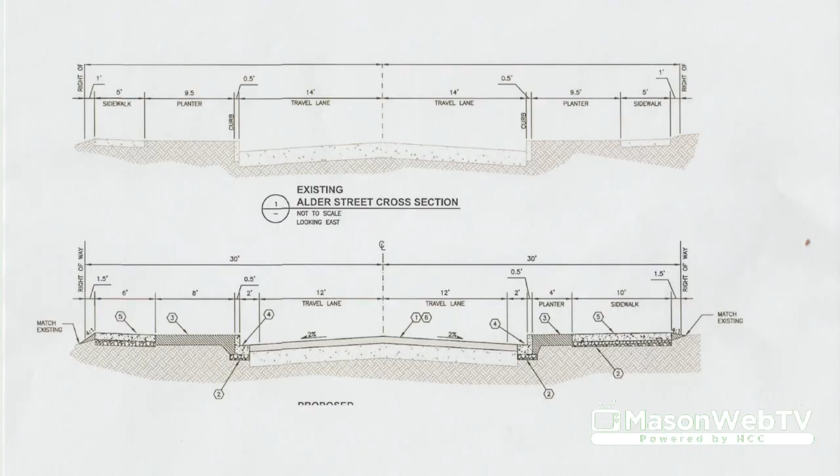Will this allow you to do some code enforcement on the north side of Alder? There are hedges across from the courthouse where you can't hardly use much of the sidewalk at all. It'd be nice to see code enforcement get people to trim their vegetation back so you can actually use the sidewalk. Yes, that will be a priority of ours, to make sure that vegetation is trimmed and taken care of before we move forward with this project.

So coming down the hill, the bicycles will be at full throttle along with pedestrians in that lane, because they don't slow down going down that hill. That is true. So there's no separation in that? There is not a separation at this point. And people on bicycles are not considered a motor vehicle by any means.

Is that what you're saying within your statute in Shelton? That is correct. And through the funding agency, TIB, this is also defined as a multi-use path. Bob might be able to speak more to that aspect of it. I think you said it correctly. I'm just curious—aren't bicycles considered vehicles? On the street, they have to obey vehicle rules. Within a multi-use path, though, they are not.

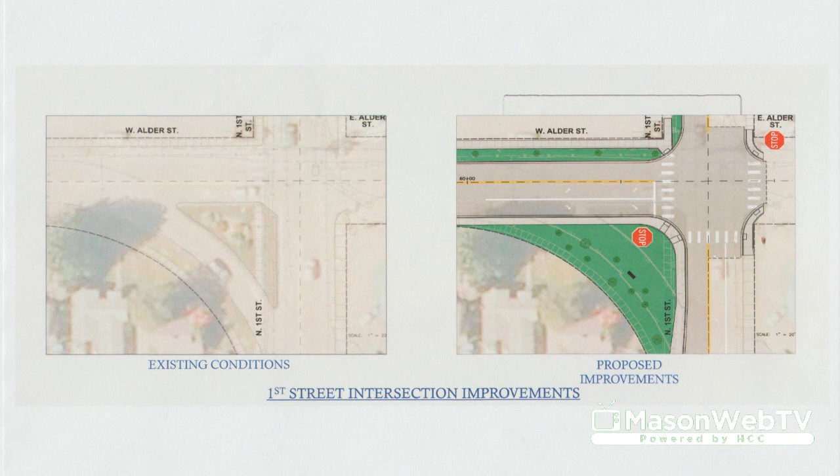So back up to First, on the drawing it had. So we're at First now. Okay, so at First Street, what we have right now is existing.

We've got this slip lane with a free movement. We've got a stop sign, southbound traffic at Alder, and then you immediately run into a yield sign as you get through the intersection.

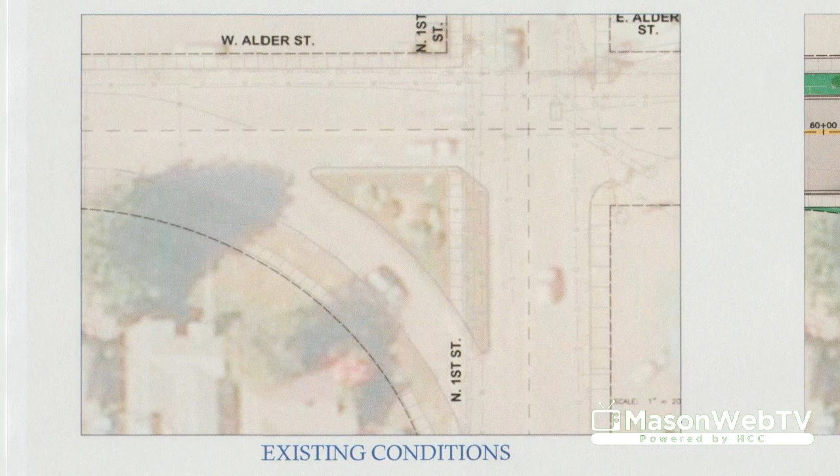We have identified that as a problem area, and our accident and crash data backs that up. So the existing proposal is to move to, and originally we talked about closing off this east side of First Street. That has now been taken out of the design.

So what you would end up with is a straight left turn lane with a stop sign, and then a right turn lane onto First Street, with a free movement on First Street north and south, and the addition of a left turn lane to not restrict traffic up the hill.

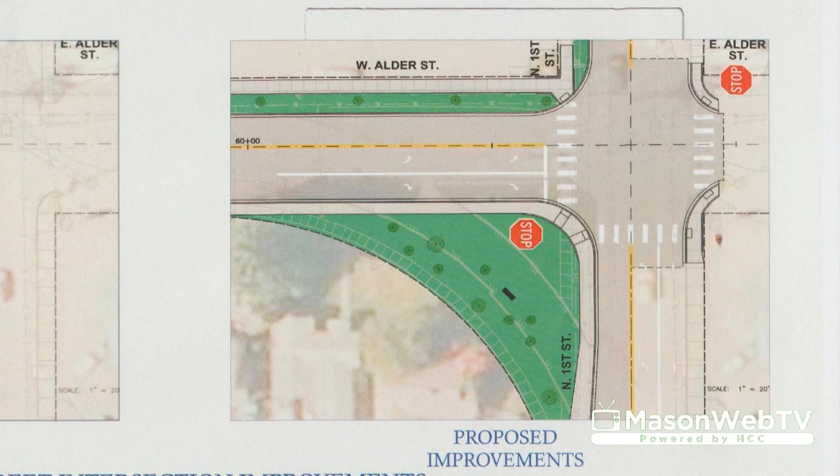So this is, at this time, the design that we are looking at for the First and Alder intersection.

I don't know if you've done a traffic count on San Joaquin, but I think you need to. That is the only in-town way off Capitol Hill. When traffic is heavy, particularly during school time or morning time, the only way you can often get out onto North Cliff from San Joaquin is when people are stopped at the traffic light or stop sign waiting, and someone gives you space to get in. Because it's a steady flow of traffic downhill, and if now it's a steady flow of traffic uphill too, it's going to be really hard to get off that intersection. And there's a lot of traffic up there.

I think at this point, this free movement up and down the hill is most likely going to improve that situation where we're not having that backup at the stop sign. So that is what we are looking at right now. We've got a traffic engineer also taking a look at that. WashDOT has reached out to us to take a look at what concepts we could come up with for this intersection. At this point, this is what we have come up with. I'm not saying it's the best option at this point. We are going to continue to study this and see if we have a better alternative to this configuration.

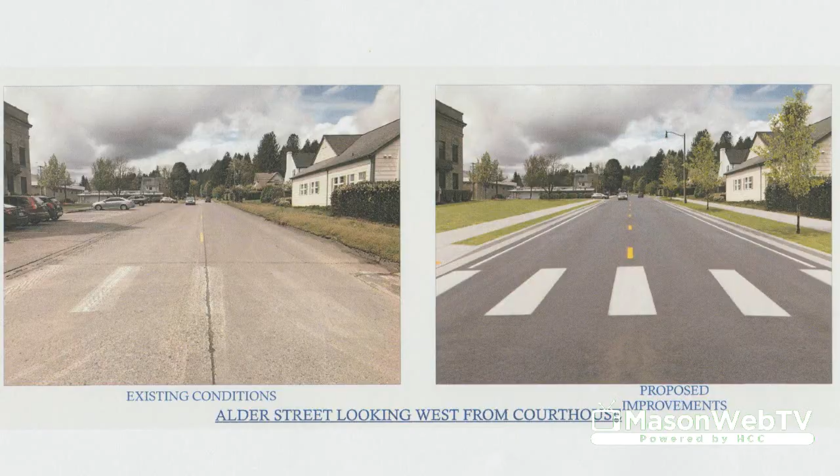So moving from First Street, this is the courthouse. On the left-hand side, you see the old configuration, and on the right is the proposed configuration. One big change is that there is no parking at the courthouse on Alder Street. That is proposed to be eliminated with some mitigation on the north side of the road at 4th and 5th. Right now, there is a large planter area on both of those roadways between Alder and Birch, which would be moving north.

So what we have talked with the county about, and we've had a few conversations with them, is how to actually create some more parking for them around the courthouse. On the north side area, between Alder and Birch, we would have nose-in angled parking created on both of those roadways, with most likely 2 ADA stalls located closest to the intersection at Alder, and then ADA ramps to cross to make it easier to get into the courthouse. So at this point, that is the proposal.

We've also talked to them about improving their gravel parking lot that is on Cedar - I think it's Cedar, where the old church used to be, right across from the sheriff's department. So we have been in talks with them about that being paved, with stormwater retention and all that.

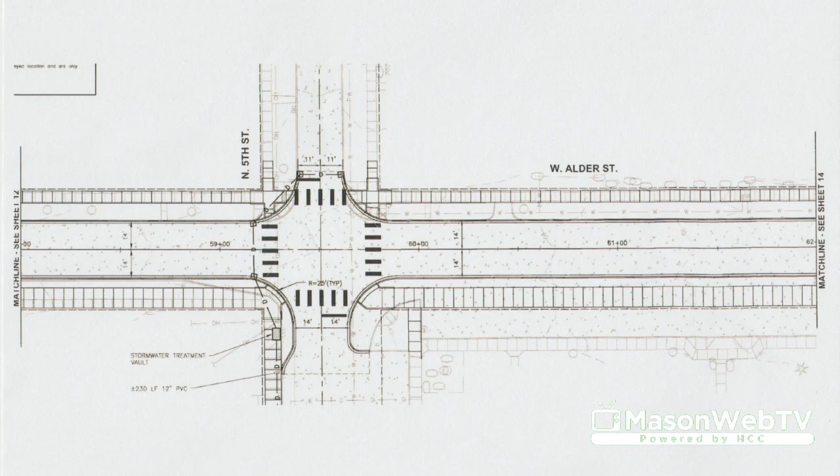So the thought right now is just trying to make that pedestrian movement a lot easier across that roadway. And the lane width there, it says 14, is it now down to 11, or is that 14? 11 is the proposed width at this point, and that is to provide some traffic calming and some slowing of those vehicles.

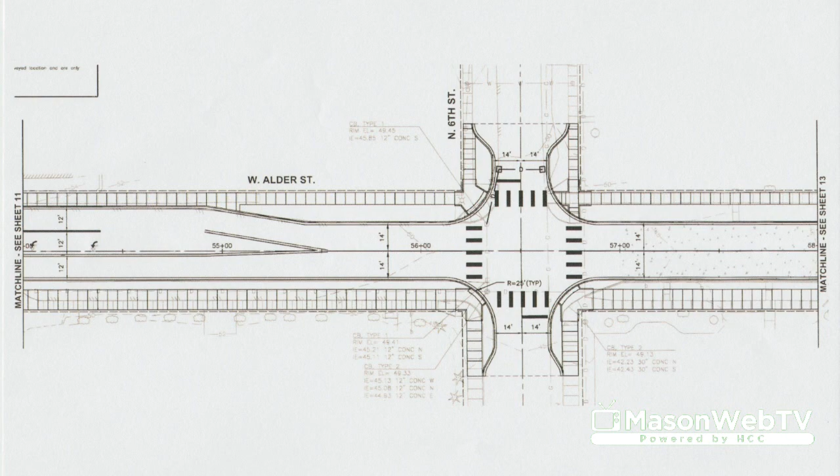And they do not have an elevator in that building, so to get ADA accessibility, they're coming right now off of Alder Street. Looking at this right now, there is no ADA parking along Alder existing. So creating some ADA parking on this side would make a fairly easy movement across this roadway to some ADA ramps here and directly into the building. We're hoping that satisfies Mason County and also the ADA public out there.

So moving through the intersection, the traffic signal at 7th Street would be a new signal. It would be upgraded, not the old style signals hanging off of wires. It would actually be standards that those signals would be attached to, something like what you see at 7th and Railroad. So a brand new traffic signal and traffic signal cabinet to move traffic through that intersection.

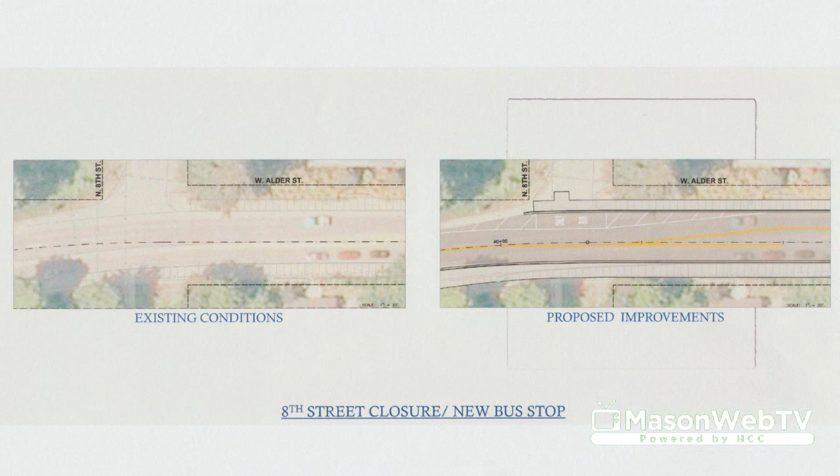And then we move up to 8th Street, moving up the hill. This is really where Danette and MTA come into play. They voiced a want for a bus pull-off for the library. So the proposal at this point is to block off 8th Street and make some on-street parking. We've heard some concerns from the library that they don't have enough parking within their lot. So making this a cul-de-sac at the end of 8th Street with some on-street angled parking on 8th, closing off 8th Street and creating a full bus stop.

And Danette, do you want to elaborate on what that would look like? So our plan is to put in a shelter similar to what you see up on Wallace Kneeland by Walmart, a larger shelter with lighting and a sidewalk up to the library for those who need it, and that would only be served by our fixed route. If you're still in need of not being able to go up the hill, we have our dial-a-ride to help with that. But for those able to use fixed route, they'll still have a nice sidewalk for traveling up to the library, and it'll be well lit. So in the evening, if you're waiting for the bus, it'll be much safer than it is right at the moment. We do stop there, but it's dark right now - this would add lighting at night.

And on the other side, we're still working on how that will work coming down the hill, exactly where we will be able to stop, and we're working with the city on a plan for that. Coming down off the hill by the bus stop, will there be a left-hand turn lane to go to the library? There will not. One thing we really wanted to eliminate was this cross-traffic turning movement.

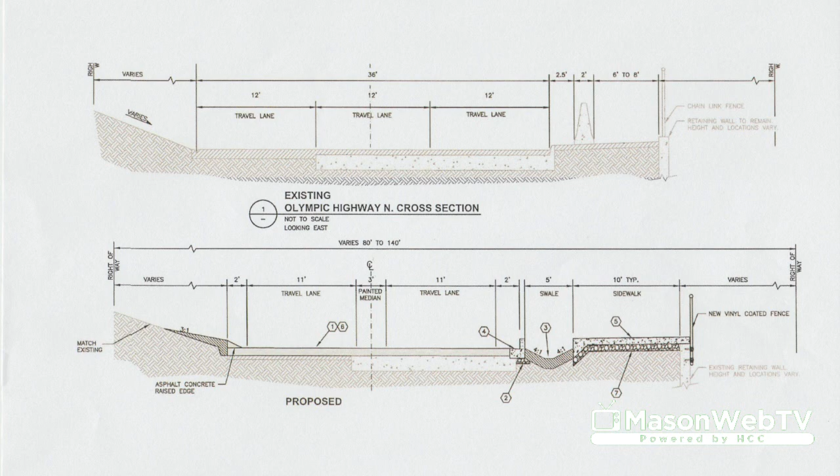So moving up the hill, this is the cross section that you see existing on the top. Right now we've got three 12-foot lanes with the large Jersey barrier separating traffic from pedestrians. What is proposed - and this is still a work in progress early on in this stage - is a 10-foot sidewalk. We've heard the pedestrian public voice a concern that they maybe don't feel comfortable not having this Jersey barrier to separate traffic. So the concept our consultants have come up with is the 10-foot sidewalk with a 6-inch curb, and then a fairly deep 4-to-1 swale with some hardscape river rock type material.

This is also where the PUD's lights and light standards would go in. The thought process is to eliminate this ugly Jersey barrier and replace it with some low maintenance landscaping and hardscape. But what that means is you would have to jump that 6-inch curb, go down through about a 2-foot deep swale to get up to the sidewalk on the other side. So you would need a very large vehicle to make that movement through that swale.

Yes, I think your hand is up first. One concern is ice and snow. Well, if it's ice and snow, none of that's going to stop anything from going through. Actually, you would still have to go over a 6-inch curb.

I'm saying, if there's snow build up, and if there's ice built up, what's 6 inches? You can still have the vehicle go over that. It's just one of those concerns. Maybe you're not gonna have pedestrians out there anyway, but to have such a small barrier for human life is... what's so objectionable about a guardrail?

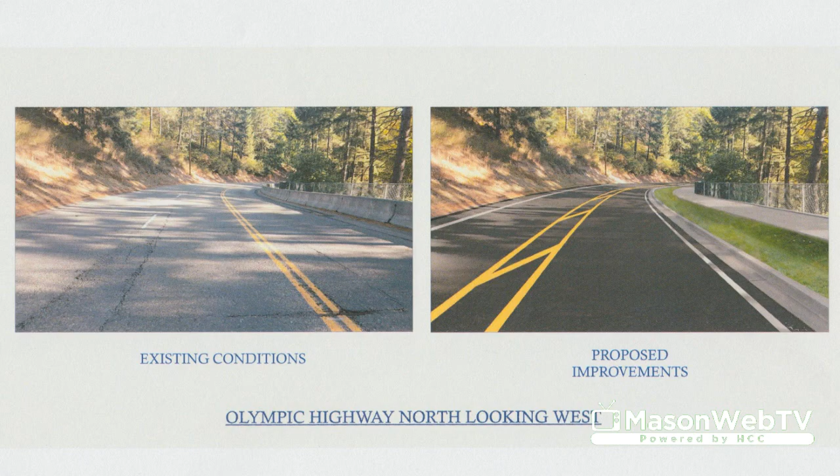We're trying to eliminate that cross-traffic turn. Right now you've got traffic coming up the hill that tries to turn across that double yellow into those 4 or 5 houses. We would locate a couple of center raised islands to eliminate any possibility of turning from the uphill movement into that small neighborhood.

So those folks, if they're coming up the hill, would have to go to the top of the hill and turn around and come back down to get into those. With 1 lane going up the hill, we can't have traffic stopping to make that turning movement. We've got crash data that supports that effort regarding that turning movement.

Would the turn onto 13th remain as it is, or do you have other plans? We're going to get to that one in just a second.

Could I ask for a little clarity about what this traffic calming is? Is it deterring people from traveling on the road, or is it trying to stop them? What is that trying to do? I don't quite understand the concept completely.

Traffic calming is a term they utilize to create a kind of side friction and narrow the lanes to make it look like you're in a narrow passage, so it gets you to have a tendency to slow down. Research studies have shown that narrow lanes, slow traffic, or curves next to it have a tendency to make traffic slow down.

So that's the intent, to try to keep people within the speed limit without having to be monitored. Correct. What are other methods of calming traffic?

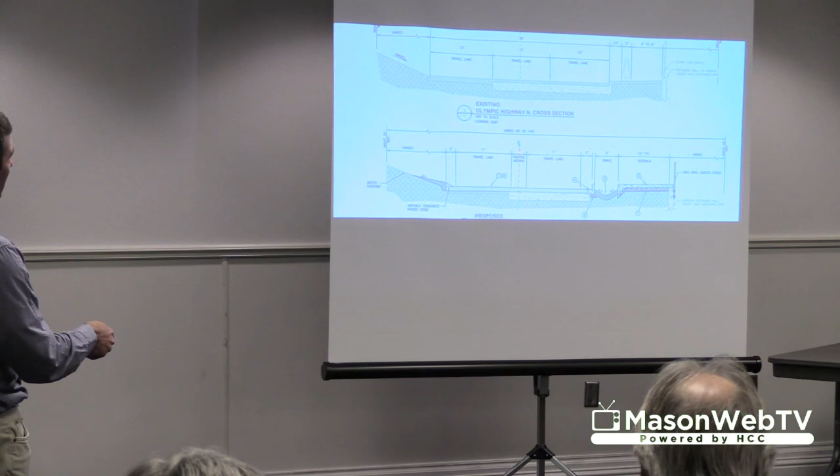Right now it's proposed to be a 3-foot wide island. We're trying to get it to 5 or 6 feet. The way we're trying to do that is, originally it was proposed that there were 2-foot buffers between the curb and the fog line. We're going to reduce those down to 1 foot and gain a couple of feet to put into that center, so that it's a little wider, so that you could pull into that as a safe zone for a stalled vehicle.

Hi, I think Marilyn had mentioned about the traffic speed on Alder Hill and how it changes, I believe at 7th Street, to 25 miles per hour. And I think he followed up that the traffic would be the same as Olympic Highway South, which is 30 miles an hour. So would it remain 30 miles an hour going up and down Alder till 7th Street? Or would it be reduced more going up the hill?

We are not proposing any speed changes at this point. We're hoping that is something we can look at after this is completed, if we see some speeding going on, or just too much speed traveling on that roadway. But we're feeling right now that this traffic calming will take care of that issue. Yes, thank you, that was my question.

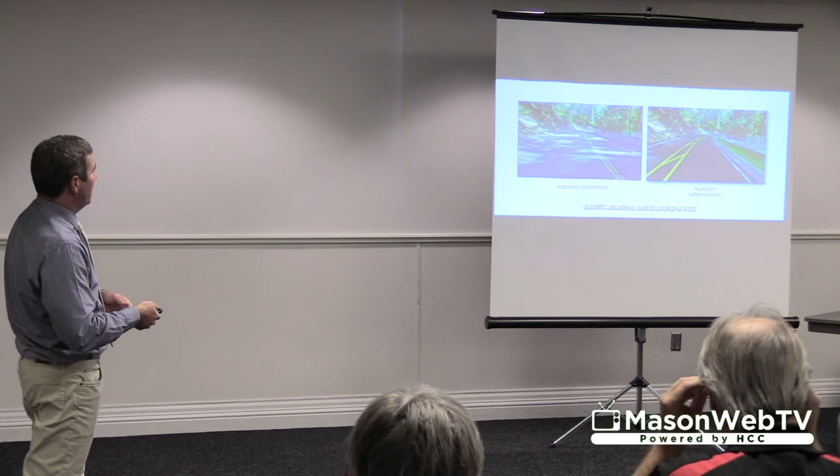Okay, thanks. So moving up past—going the wrong way—so we get to the hill section through the S-turns, and the next proposed change, A Street, which is at the top, just as you get through the S-turns, is a gravel road.

It would be this road here—the gravel road that leads up into the neighborhood off of 13th Street—and we would propose to close that off. It's a very poorly maintained gravel road at this point. It takes a lot of beating throughout the wintertime with traffic trying to pull up there and hitting that with a very small apron. So we don't see a lot of need for that roadway at this point.

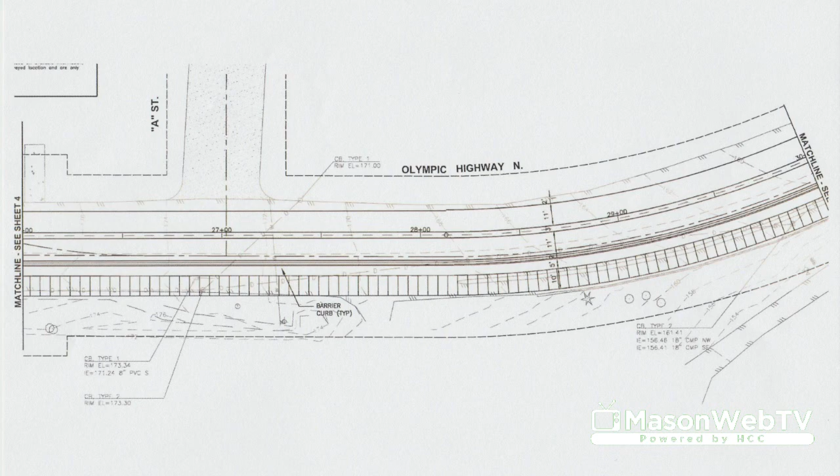This neighborhood can be accessed off of 13th to get into that, which also eliminates traffic coming out and trying to turn onto this limited sight distance roadway at some speeds at 30 miles an hour, which probably don't support those sightlines.

So moving up the hill to B Street, a question we had earlier. The proposal is to eliminate this ugly yellow triangle that we've got there now, and add a right turn lane to get out of that travel lane up the hill with the movement onto B Street, with the potential with Mason Conservation District of doing some kind of stormwater rain garden up in this area.

And eliminating this, we're proposing to move this downhill lane, turning onto Olympic Highway North, move it downhill just a little bit to increase the sight lines, and also position it so that you can't make this cross-traffic turn onto B Street off of Olympic Highway North.

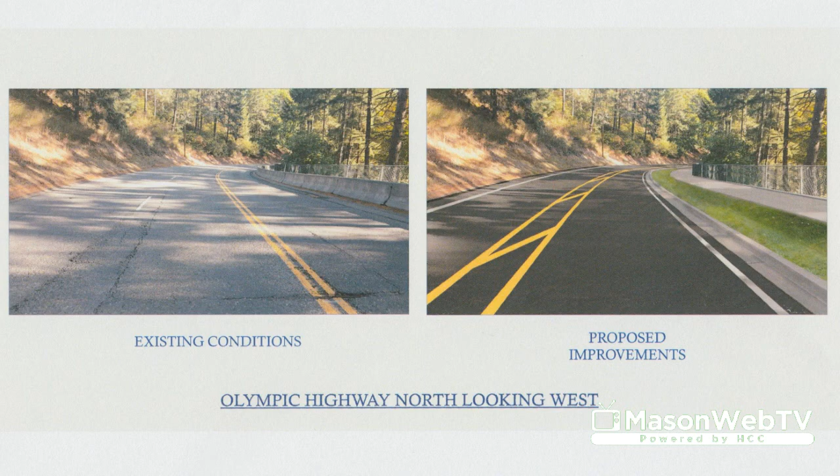Are you still accessing from whatever street that is? North 13th—yeah, so you'd be able to come down North 13th and make the left, go down the hill. Is that what you're asking? You can't from Olympic Highway—you can't make the left onto B. You will not be able to make a left-hand turn, cross-traffic turn, heading southbound onto B Street.

But how about from B Street—can you turn left off of B Street onto... Yes, B Street, we will not eliminate that movement. So you can still turn left. Correct. Okay.

What we really did was, by positioning and sliding this lane down the hill a little bit, we created some better sight lines, not only down the hill but up. If you're familiar with this area, right now it hugs this side here, and there are some fairly large bushes and residential landscaping that make it very difficult to see up the hill. So by shifting it down, we're hoping that increases these sight lines up and down the hill.

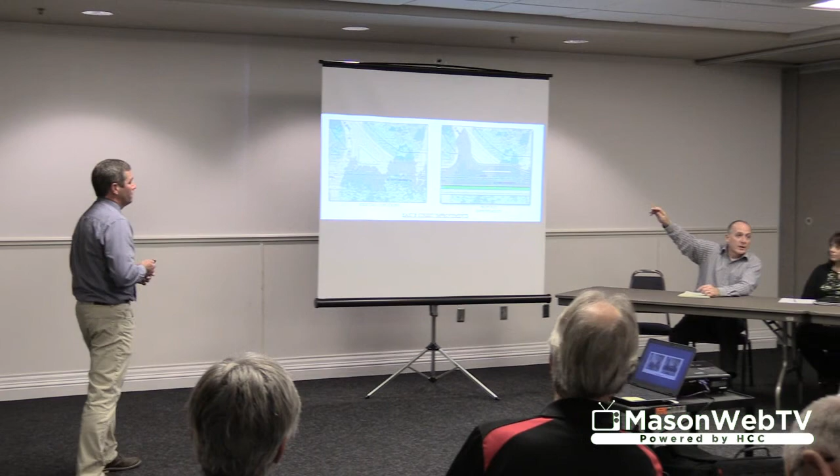Like we said earlier, that intersection radius there might be a little bit shallower than what a truck or a bus might be able to get through. So your concern was raised earlier - we're going to have to evaluate that intersection as well, to make sure that radius can handle trucks as well as buses.

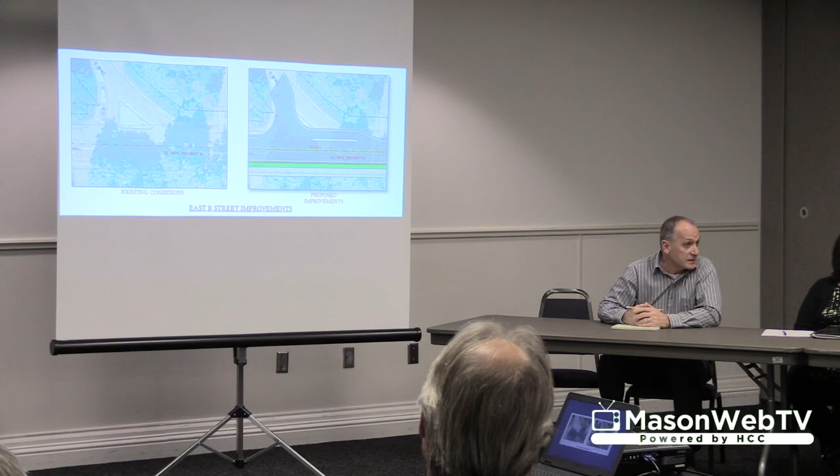What's the difference between turning left off the Olympic Highway onto B, and turning left off of B onto the Olympic Highway, right in, right out? Well, right now you've got a stop sign here. And what you would be doing with one single lane of traffic up the hill, if you stop here to make this turning movement, you're going to be stopping all the traffic behind you also. So that's really what we're trying to eliminate - this stopping mid-block. How do you open it for people to turn left from B, but close it to keep people turning left from the Olympic Highway?

To go to their house. Well, this stop bar, or this gore line, doesn't quite show accurately what it's actually going to do. So this really shifts up and tries to cut off - you technically could still break the law and make this turning movement across this double yellow and across this gore line, but this is going to shift uphill so that really this is just a free movement onto B Street off of this turn lane.

This is actually going to be slid up to about right here. So technically it's going to be illegal to turn and cross this double yellow further down the hill. So you'll have a break in it here, but positioning-wise it will not be legal to turn across that - but it is legal to turn across it coming down. Well, the break will be positioned further up the hill for this traffic to make this movement, coming down the hill, coming out of the neighborhood.

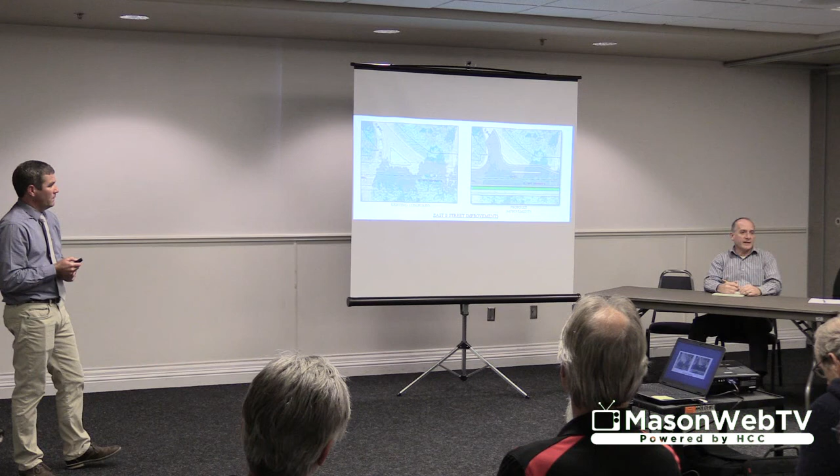So, yes - why not just eliminate that whole thing and have everything at the top of the hill, put a stop light at the top of the hill? There's enough volume going up and down to the hospital from that right turn that it would cause a lot more impacts than shifting the traffic to C Street, which isn't really built for that. So the movement's probably going to stay the way it is, so as not to hinder people getting up to B Street, up to the hospital, or the area they live in.

And we have done traffic counts and also run this by our traffic engineer. The closing - because it was proposed to close that roadway off also - we thought otherwise of it once our traffic engineer took a look at it and studied it. Yes, I think you had your hand up.

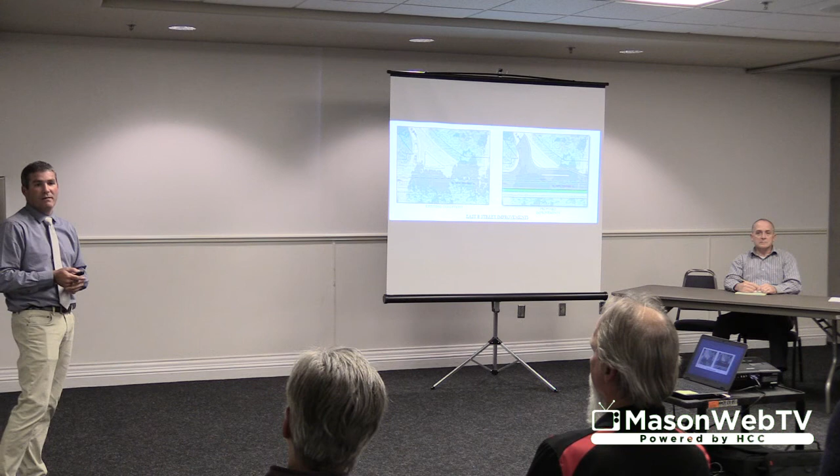How about right in, right out? Right in going up the hill, right out coming down B, not crossing Olympic Highway at all. So, like I stated when we first started this, that is something we've looked at. This is not set in stone by any means whatsoever - we have to give it a little bit of time. This is very early on in this design. Our traffic engineers and consultants are taking a look at it, and that may be something that comes out of it ultimately.

It seems contradictory to talk about traffic calming, and yet at the same time to cut off what are neighborhood access points, so that people can go straight through without having to stop for a left turn.

Well, if you look at what we're proposing, these are illegal at this point. We're just making it so that they can't actually break the law. But I think you have to consider that if you make it too hard to use that street, that's the way off the hill to downtown. But we're not proposing to eliminate that at this point.

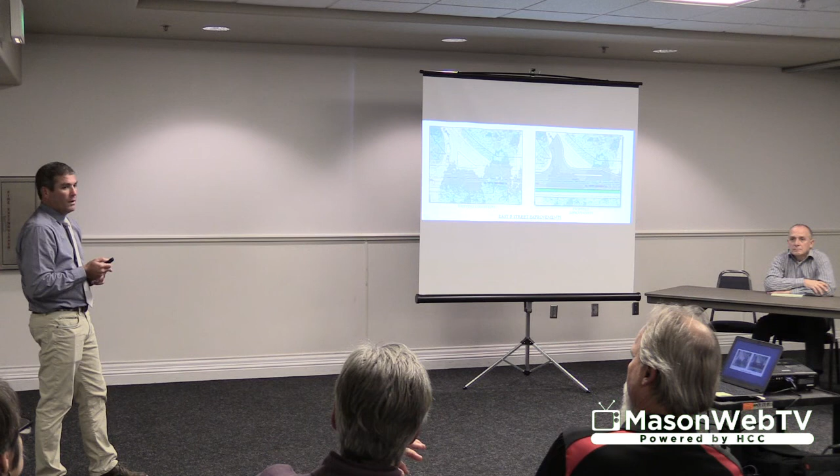No, but it just seems like you're cutting neighborhoods off, and at this end you're trying to make it a fast-moving arterial that doesn't stop, and you're trying to slow at other places. We're actually traffic calming through this area, and by cutting A Street off and eliminating this movement, when you get to B Street, if you don't go on A Street, just back down the block, you would turn here onto Jefferson and you'd be at the same point. So we're not cutting off those neighborhoods.

You're counting on pedestrians crossing there. No, absolutely not. That's an intersection with an implied crosswalk, and there's no other way for people who live on B Street to get to the sidewalk.

C Street, so as we move up the hill, we get to C Street. That's also been a conversation with MTA. They have a bus stop up towards Skipworth, and we're locating a rapid flasher at the top of the hill at C Street, which has ADA ramps and also sidewalks. So it's not out of the question to walk a block to get to a safe intersection to cross.

We would discourage any pedestrian traffic moving across Olympic Highway North in that section. But it's legal. I think you had your hand up first.

You said you were going all the way to Skipworth. Correct. So is there any talk about having a light right there? You know how the crest of the hill goes—having a light right there by Skipworth, like a big bright light, maybe a flasher.

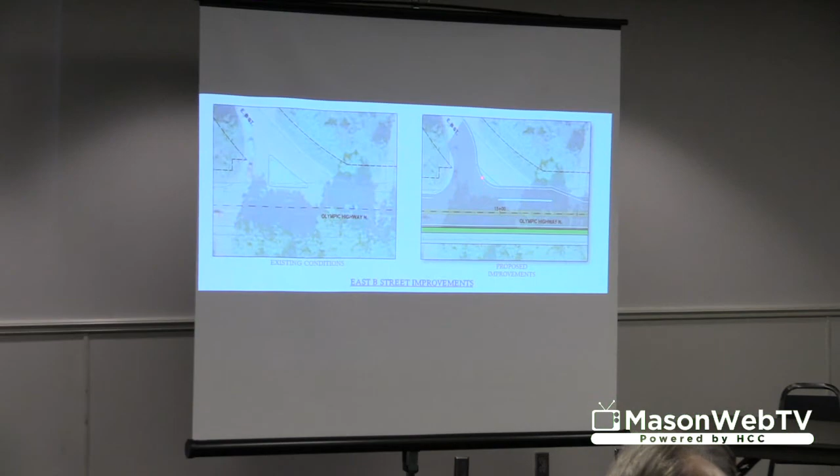Just for clarification on that last picture, the Olympic Highway would take traffic from B Street up and off of Olympic Highway. That's all that design allows. Is that true? This movement would really just be improving these movements. The only one you're eliminating is the cross-traffic turn heading southbound on Olympic Highway North. Everything else is proposed to stay exactly the way it is now.

Thank you. Just for clarification, to make sure I understand, when you get to C Street, you're going to have a left turn lane in the middle, so people making a left going towards what should be that bridge over 101 at some point. That is correct. We didn't include a slide at C Street, but at Skipworth, going up the hill northbound, it's proposed to have the through traffic lane and then a center turn lane with a left turn across onto C Street.

That is correct, and that's really important because so many people go down that street right now because there are two churches at the end.